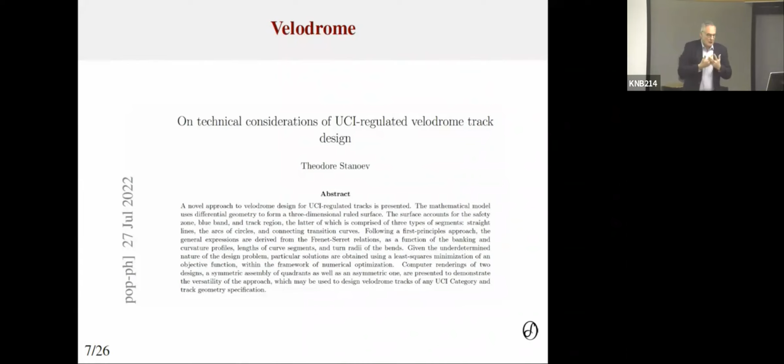He did a very nice study of the shape of a velodrome, which from the mathematical point of view is differential geometry. And in the way that he did that, that's his velodrome. And that's a quarter of a lap of a velodrome. And you can see certain things very clearly here. Of course, you see the banking of the velodrome.

And the banking, or velodrome in general, is a ruled surface. That means that you have a straight line that changes the inclination. So it's a different inclination here, about 13 degrees, and different here, about 46, but at each point, if you were to go perpendicular to it, it would be a straight line. People sometimes, when they look at the velodrome, they think it gets steeper as you go higher up. It doesn't. It's a straight line. So the angle of the velodrome is as much here as it is near the bottom. That's what it means that it's a ruled type of a surface.

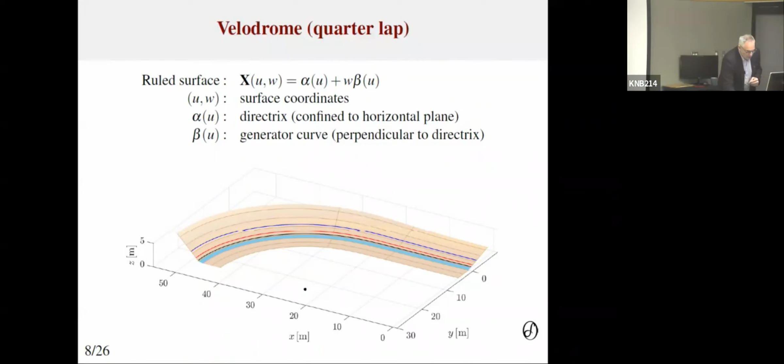And then he did a number of formulations, which I am not going to talk about in detail, but there's another paper in arXiv that he did. And from this, we divide a velodrome into 3 parts. We have a straight, we have a curve, which is a part of a circular arc, and we have a transition curve, which is extremely important. It's particularly important on the train, when you are on a rail.

That means when you're going from a straight line where the radius is infinity to a part that's an arc of a circle where the radius is, say, 25 meters, you want this transition to be smooth. You don't want to go straight from an infinite radius on the straight to a 25-meter radius on the arc. So you have a transition zone, something very important in trains, because if you don't have it, you would have many trains that would be derailed or be very uncomfortable for the passengers.

Actually, to do that, I'm not going to go into details, but you look at the third derivative of position with respect to time. So the first one is velocity, the second one is acceleration, and then you look at the third one, that in English is called a jolt, and in American is called a jerk. So here we are, but trying to simplify it, of course, we do it in such a way that when we add straight, transition, and the arcs, we have to come up with 250 meters.

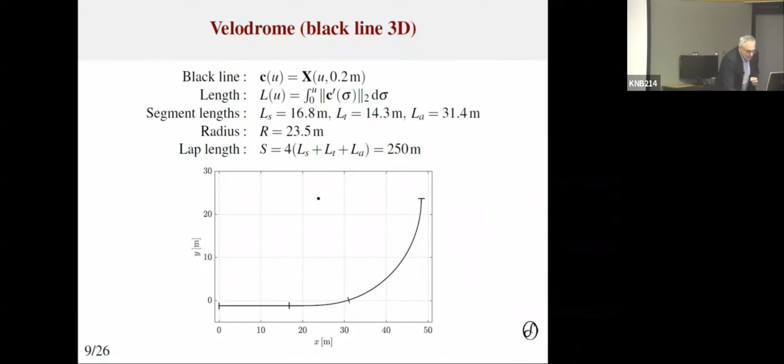What we did is that we put it basically into a two-dimensional structure to make it simpler. Why two-dimensional? Because the cyclist follows the black line, the one that's on the bottom. This black line is not really horizontal because, of course, when we lift it from 13 degrees, say, to 46, this black line moves up slightly along the curves. But we decided it doesn't move enough for us to worry. And also the cyclist does not necessarily follow the black line to within a millimeter. So trying to stick to that would be an unnecessary precision that would not increase our accuracy.

You could see in the picture that we saw before, Filippo Ganna would sometimes get off the black line. At the time you didn't see it, but maybe then we can show once again this short video, and then you will see those things. So what we did is precisely that. We have those three segments of the curve: straight, transition, and the arc lengths, they sum to 250, and the radius of the arc is 23.3863. We do it up to 4 decimal points, but of course, within the model, one can also be rounding that up. That wouldn't be such a problem.

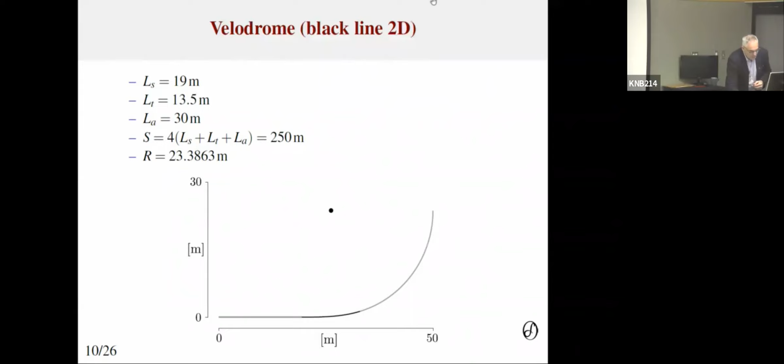A few comments about these transitions. What we are doing is that we have a curvature of 0. The curvature being, in this case, the way in our formulation, just 1 over the radius. So along the straight, we have 1 over infinity, so curvature is 0. And then over the curves it is 0.04. And that's precisely it: we don't want this to be a jump.

We want this to be a transition that's reasonably smooth, and we did it as a cubic polynomial in our model, which is consistent with the velodrome itself. And the reason to have that is that the cyclist can follow as much as possible the black line, 250 meters, without getting off the black line so as to make a curve.

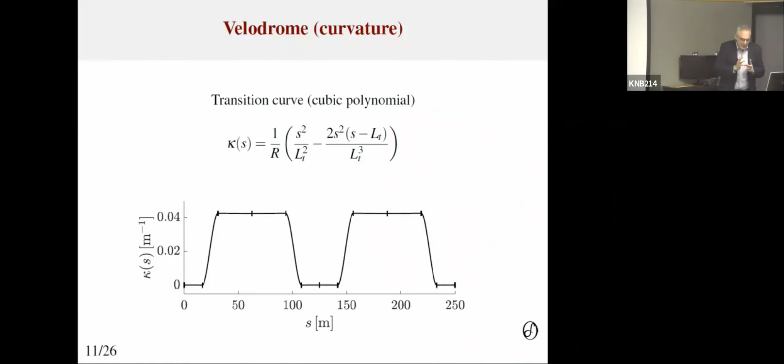Because that would be akin, say, if you are running 400 meters on a running track, you want to be running in the first lane, and you want to be running very close to the grass of the field, not somewhere towards the end of it, because it'll still count only as 400 meters, while you might actually run 408 meters. So that's why it's important to make this very smooth and to allow the cyclist to follow that direction.

The banking. The banking fits very nicely a trigonometric model that we do, and they are generally of the same type. Sometimes they might be 13, they might be 8, they might be 14, and as far as the steepest part, here it is 46, which is rather steep. The velodrome in Bordeaux, for instance, we have there 44.

So the regulations are a little bit more flexible than in the running track. You have to be within certain limits. The limits are small. You can change it within a couple of degrees, but you have certain flexibility. The one in Grenchen is quite steep, 46 degrees on the steepest part, 13 along the straight line.

And there's an interesting point that we assume to be 0, but as a matter of fact, it's not uncommon that this curve would not be symmetric from the point of view of the long and the short axis of the oval. It's not uncommon to make the steepness of coming out of the curve slightly steeper than coming into the curve. But the difference is so small that for our estimate of power, it becomes negligible.

Finding out what's negligible in our formulation is one of the key aspects of doing a good model. We want a model to have as few parameters as possible while still being adequate for our formulation. The other assumptions are that the rider is following the black line, which is to a large extent true, but not exactly. We also assume that we have a rider that maintains the position all the time, and we assume a steadiness of the speed of the center of mass.

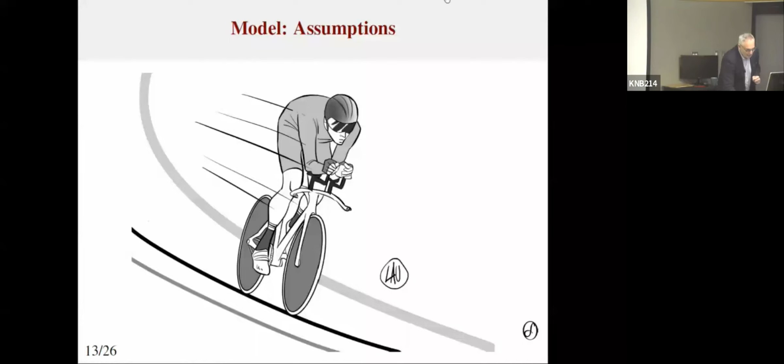Is it a good assumption? It's not a bad assumption, but one could claim, for instance, that the assumption should be that the cyclist is almost all the time trying to regain the equilibrium by correcting very slightly the wheels. So that would be another model, probably wouldn't change very much when it comes to the results. So that's why we decided to follow that pattern.

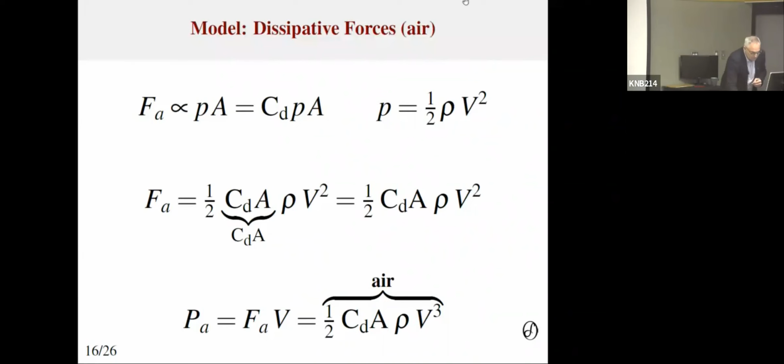And now the idea of missing something from a model that seems natural not to include. On the velodrome, we are riding on the so-called black line. It is black. Apart from this tiny lift about the curve, because the surface comes up by a dozen or so centimeters, which is negligible, it is flat. So we don't have to worry about the force of gravitation. Why would we? We are going on the flat. We shouldn't include it in the model. And I must say, all the models that I know before our model didn't.

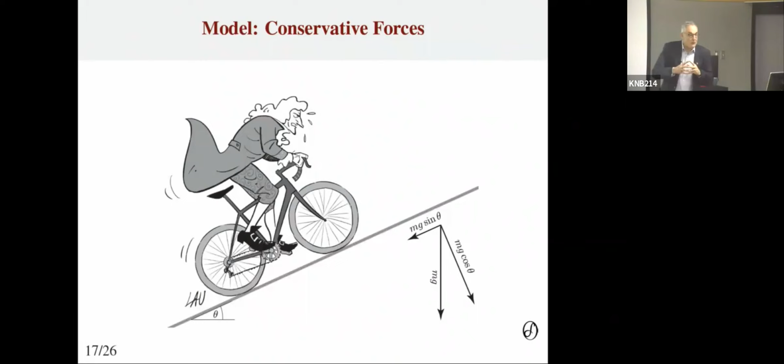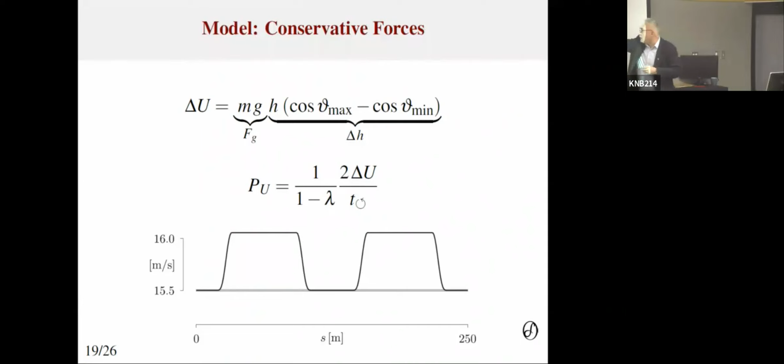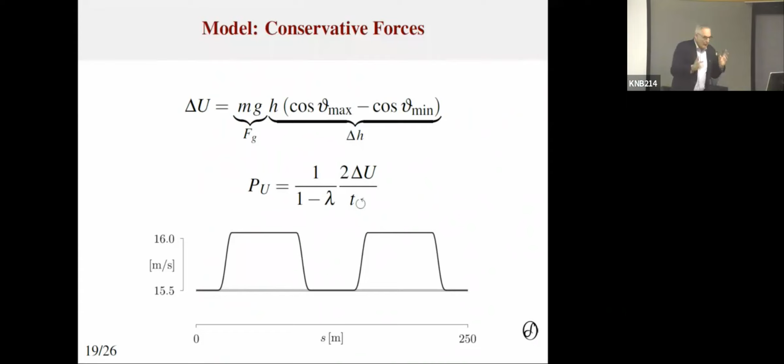And the power associated with it counts the fact that you do it twice every lap, because you have a curve on each side. That's why this 2 appears here, divided by the lap time to give the power: force, work, and then power here. 1 minus lambda. Why? Because you gain it from your speed, and your speed is dissipated to a certain degree, maybe not very much, by the smoothness of the operation of your bicycle: bottom bracket, cranks, hubs, and so on. So that's how this works.

Now we go for empirical validation. In spite of the group of people you saw cheering Filippo towards the end of his ride, most people were put in a small part of the velodrome, because the idea was not to open it to the public, so as to be able to control the humidity and things like that. Only invited people could go. But those of us close to Filippo when he was about to start seem to have heard that he said,

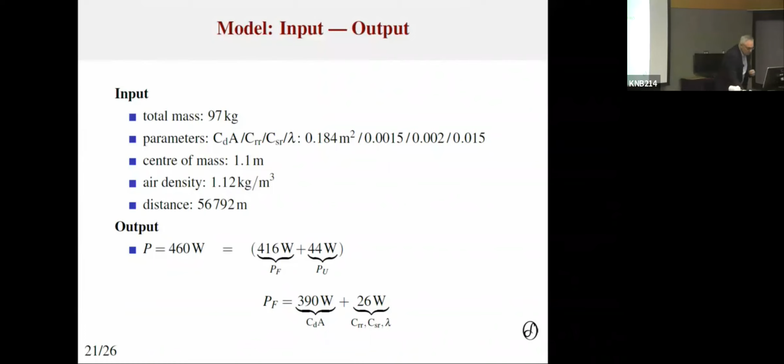Now, there's a couple of things. Depends how you respond to being at such an altitude. There's also something that's very important, that having a schedule of races, you might not be able to go to Bolivia at 2,600 meters for a month or 6 weeks before to acclimatize because of the races that you have. The way that Filippo did it, he was just flying back from Australia, where he was participating in road world championships, to Paris, where he was participating and winning the track world championships. And that was basically a passage from Australia to France, meaning that he had a few days to do this record, not several weeks to get acclimatized in order to perform at a high level, at a high altitude.

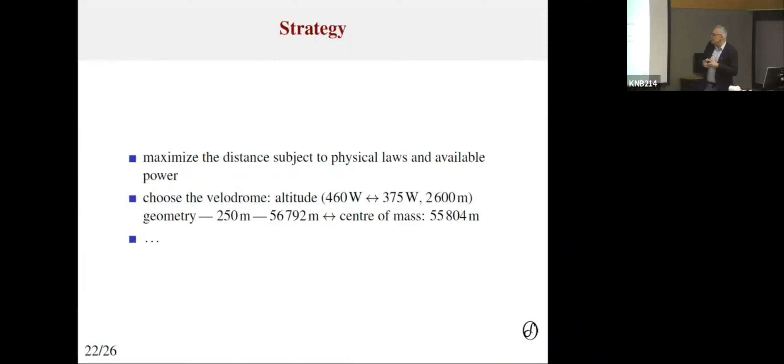There's an interesting thing that comes from it, that when you make it reasonably tight velodrome, your center of mass is covering significantly less distance than actually the distance along the black line for which you are credited. So in the case of Filippo, the center of mass covered almost a kilometer less than the distance that his wheels covered. The wheels covered at least the distance, 56 kilometers, 792 meters, whereas the center of mass, because of its lean, covered 55 kilometers, 804 meters. And of course, the tighter the velodrome, the bigger the lean, the greater this difference is going to be. So if you were to do it on a straight line, say 57 kilometers, you would need more power than you need on the velodrome, where you are leaning quite a bit, and hence your center of mass is covering a lower distance.

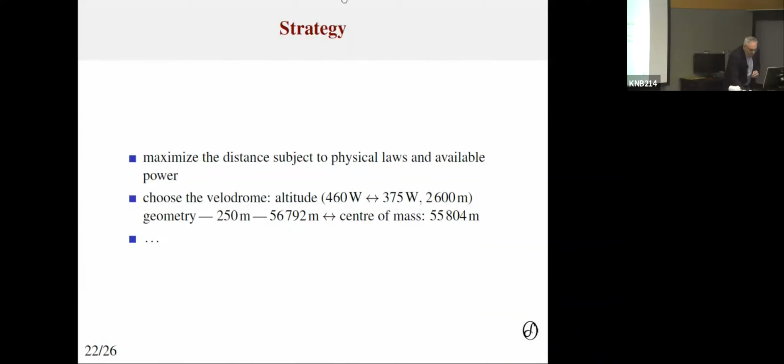More about the strategies. Here's the distance of Filippo, 56,792, which is 227 laps plus a little bit. It's done up to a meter. So when you are finishing, for instance, there's this bell, if we put it again for you to see, you will hear there's a bell of the last lap, because we know that he will not have enough time to complete that lap, but he goes a portion of that lap and that's added to it. So it's not the number of completed laps that counts, but completed laps plus delta, whatever is on the last lap.

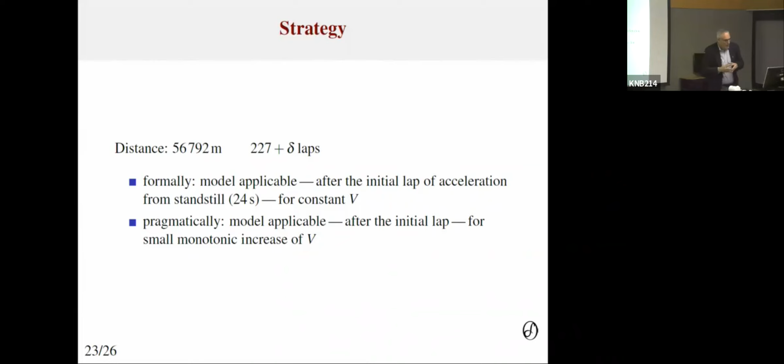Formally, our model is applicable after initial acceleration, which we said we won't take into account, starting from standstill to reach the speed, for constant center of mass speed. But as one always does in physics, one always stretches a little bit the applicability of a model. We do it even in thermodynamics, as I mentioned at the beginning, that we formulate our model based on equilibrium, and then we allow ourselves small deviations from equilibrium that would still be correctly described by the model that was really done for the equilibrium. So pragmatically, as opposed to formally, the model is applicable after the initial lap that we don't take into account, for small monotonic increases in V.

So there are two types of strategy that we looked at, and we followed rather strategy number 2. I say rather because it's not necessarily that exact once you're on the velodrome and on the bike, but it's been quite well done, especially by Dan Bigham, who was extremely well prepared and who focused on every detail of his formulation. You can do a steady ride. So you basically start, and after the first lap, you continue the same lap time, the same speed, and say 57 kilometers per hour will give you the record of Filippo with 460 watts, as you saw a while ago.

Strategy 2 is a linear lap time decrease. So you very slightly increase your speed from the beginning. You start at about 55 kilometers per hour after the first lap, and you finish at about 59. So your average is very similar, 461 as opposed to 460. So with an experimental error, you can basically say it's the same. However, since you are reaching the higher speed, 59 kilometers per hour, towards the end of your ride, your power for the last lap must be about 511 watts. You might not have it to be able to do that. So that's an important consideration.

Why would one do that? And that's something that maybe my colleagues from CORE are listening to, and they can say more, because that enters into physiology, and I did the physics and mathematics, not physiology. Actually, something I'll tell now, I didn't know that. You probably know because of your field of studies, that our internal temperature increases significantly during this kind of an effort. A classic temperature of our body when we are in good health is 36.6 centigrade. The temperature of the inside of our body raises itself up to almost 40 degrees.

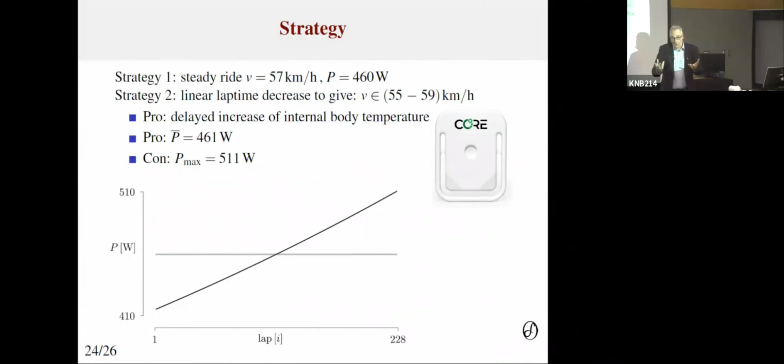Can we do it? That is one of the very final questions. Can we do it within a model where we assumed that our formulation is for the case of a constant center of mass speed? And here clearly we are increasing our speed, very little, but we are increasing. So one of the key things when we choose to violate the assumption of a model, which is very common in physics, in modeling, something we do all the time, we want to know how much this violation of the assumption is making our models invalid, or at least causing errors, how much, and so on.

So the thing that I would like you, you probably cannot see from where you are, but I'll tell you, the average power per lap here, starting on the second lap, is 415, and then finishing at 460. That's the total average. The one per lap starts at 415 and finishes at 510. The power needed to increase your speed by a little bit every lap is in each case about 0.4, less than half a watt. So the idea is that if it's less than half a watt to increase it, I'm still basically within the equilibrium, to use a thermodynamic type of analogy. I am still within the equilibrium in which I created my model, so I can allow myself to study a formulation where we have a gentle increase of speed and the results are still trustworthy.

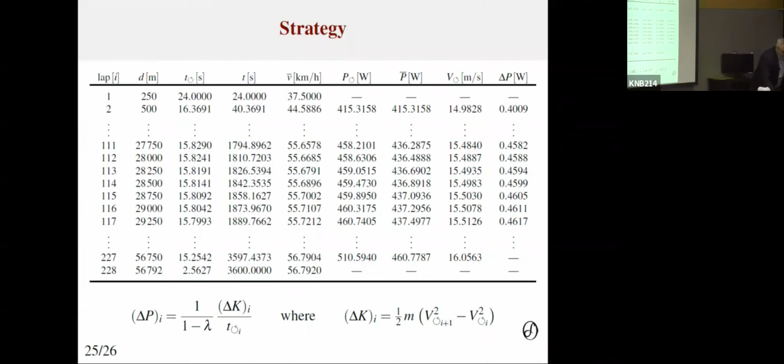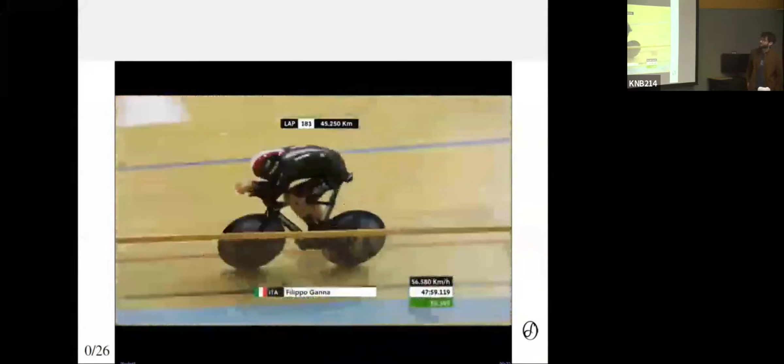And here is the coach. You can see here as he passes Marco Villa, the coach of the Italian track team, and he's letting him know the times. Here he was with an iPad below showing the time for that lap. Here you see he's showing the time with an iPad. He's supposed to finish the last lap even though he covered an hour. That's the rule. And then he's off.

Wonderful. All right. Would anyone like to start us off with some questions? Sure, Art.

I guess the idea was that he should have done the decreasing lap times. Yes. And I'm wondering, was he able to? Did he succeed in doing that? He did, although he did have sort of a crisis after about 3/4 of an hour, and his speed decreased, and then he picked up again.

So from the clinical point of view, the performance of Dan Bigham, who did the hour record before, was more focused on the hour record. Not quite alone, because he also is a great champion on the velodrome now, but he had more focus on the hour record. He was following that more closely. Filippo, having a lot of other things to do from the point of view of road riding and so on, was not able perhaps to follow it with the same accuracy that would have been optimal.